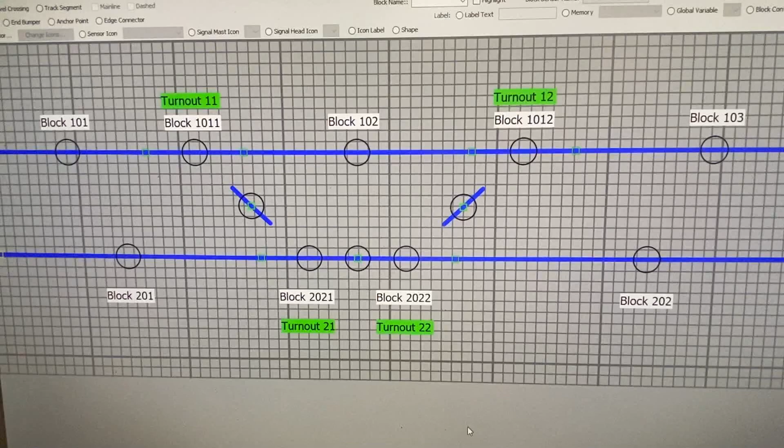Hello everyone. Welcome back to some more discussion of how to set up signaling using JMRI and specifically the SE74 from Digitrax. I was specifically asked to talk a little bit about a more complex situation where we have two crossovers back to back with the points connecting here at the bottom.

Let's talk just a little bit about my nomenclature. I call this mainline 1, mainline 2. And I tend to then use the numbers 101, 102, 103 for the blocks. And each turnout has its own block, which in this case, just so that I understand that it's a turnout, I use four numbers, so I'll use 1011 and 1012 for those.

2's on the bottom, again 201, block 2021 for turnout 21, so forth. And I start my turnout numbering 11, 12, 13, 14, whatever. And on the second main line, turnout 21, 22, etc. It just kind of keeps things a little more simple. So at any rate, the problem is how do we want to set up signaling for these various turnouts?

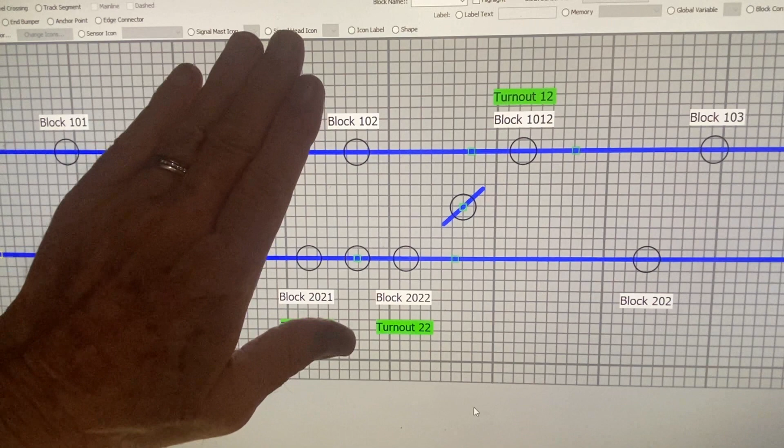If you've watched the other videos, then you know how to set up, for example, the signaling for a single crossover here. And that was explained before. We won't do that again. I will put those signals in here and we'll talk a little bit about them. But the logic behind them, I'm not going to dwell on too much, although we will cover a little bit of the logic because there's certain things that we want to make sure that everybody understands

why we're doing a particular thing. So also the other concept that we would like to do is to use the minimum number of signals that we can do rather than putting a whole bunch of signals along here that clutter up and really start to become difficult to not only set up but also to read if you're the engineer or running your trains on this layout.

Also, I'd like to point out that I consider or assume that the two turnouts making one crossover operate together and not independently, so that if we change this turnout, it also changes turnout 11, so that the crossover is complete. We assume that you don't turn one turnout without the other one. You may find a situation where that's necessary. In most cases, I don't think so.

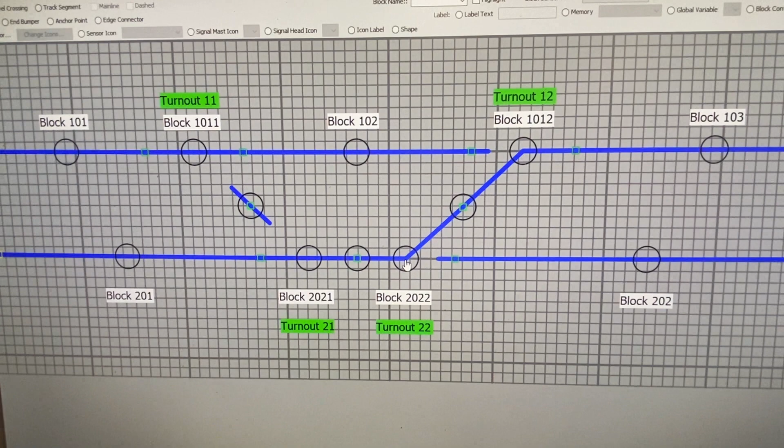So both of these turnouts are set up to operate together and not independently, and that will affect what kind of signals we put in here. For example, if you're familiar with the terminology from before, we would have an A1, A2 signal here. We would not need a C signal coming this way because we assume that if you pass this turnout with an A1, A2 signal, that it was clear all the way through. We will have a B signal here and a B signal over here.

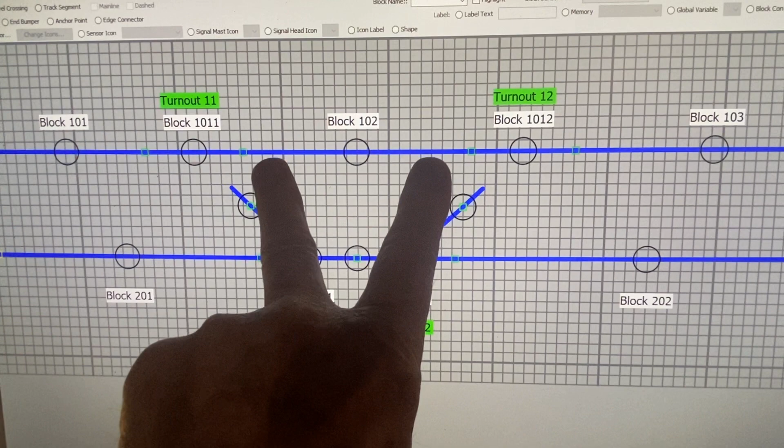The problem that we would like to avoid in this case is to not have a whole bunch of signals in a row up here. Now, some people might say, well, this particular block should be split and part of it go with block 1011 and the other part with block 1012. Okay, I could go along with that. However, the way I set it up, there is a block between these two turnouts. It may or may not become an issue,

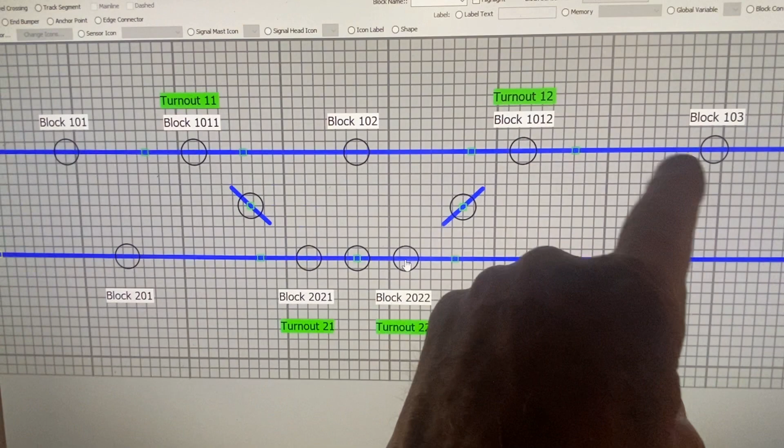but the main concern is how to deal with the signals on this upper turnout, or upper main line, because we would like not to have to put signals here, here, here, and here to accomplish our mission. And we'll talk about that in just a minute as we look at how we place the signals.

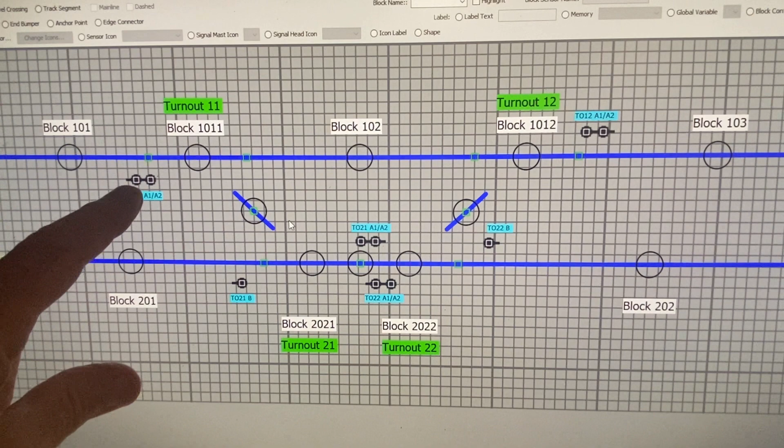Okay, now I have added various signals at the points where I think they should be. I've labeled them appropriately. For example, here, this is turnout number 11, A1 and A2, the top one being A1, the bottom one being A2. If you need to go back and look at some of the previous videos where I explain why this terminology is used, it might help you to understand what we're doing here. If you remember all of that, fine.

I'm going to run through a couple of things with you here about why we're setting this up this way. Again, this would be turnout 21, the B signal, and you notice that nowhere on here do we have a C signal. So we're not using those. We have 2, 4, 6, 8, 10 signal heads that we're going to set up to operate our layout.

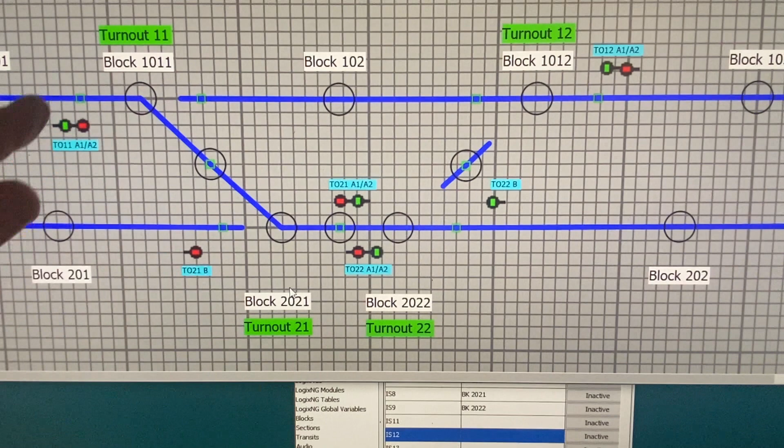Okay, in this situation you can see that I have placed the signals and I've made all of the normal logic that we would encounter with a signal element, except we do not have any C signal heads placed on here, as I explained before, because we'll assume that if we are making the crossover, if this is green for the turnout and this is green for the turnout, we don't need a C to indicate that this turnout is set correctly, because this light will govern passing here all the way down until it gets onto the second main line.

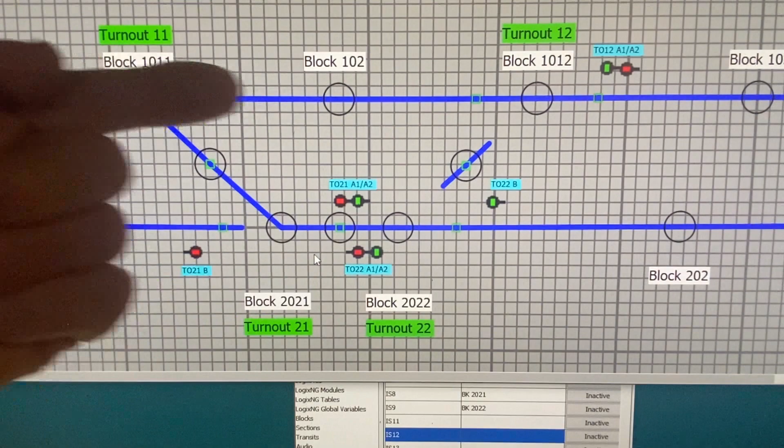So in this case, for this turnout complex right here, signal element, this is A1 and A2 for turnout 21, and this is B for turnout 21. Likewise, we have A1 and A2 for turnout 22 here, and we have 22B up there. We've also placed the A1 and A2 signals for turnout 11 and turnout 12.

Notice that in this case there is no B for the main line against the turnout. And again, we don't have a C because we're assuming that this signal head will control the flow of traffic through the turnout, through the crossover.

All right, so at this point we have all of the normal operational heads set up as they should be, so that as we throw these turnouts, the straight through goes red and the turnout for the crossover is green. Likewise here, this goes green on the bottom for the turnout going through the crossover. Same with the signal heads for turnout 12. So these are all working as we would expect them to, as we have demonstrated in previous videos how to set them up.

We have also connected all of the block detection, so in our sensors table down here, we have all of the blocks listed, and if we make any one of them active, like 101, you see that block 101 over here is now red, and likewise we can make any of the blocks active by just clicking on the sensor and changing it to active, and then it will do the appropriate thing.

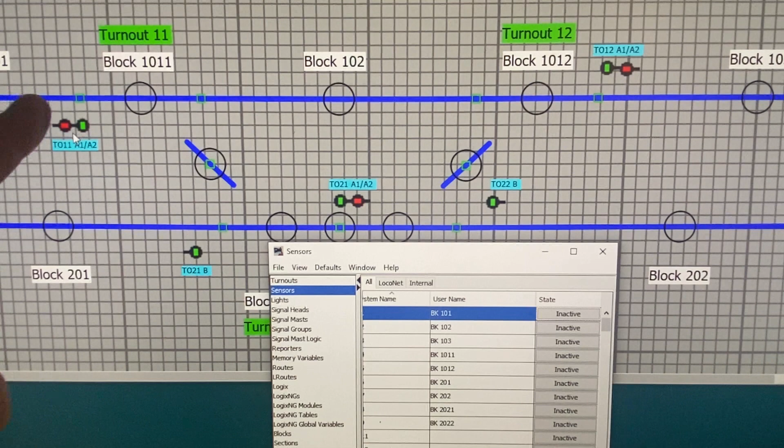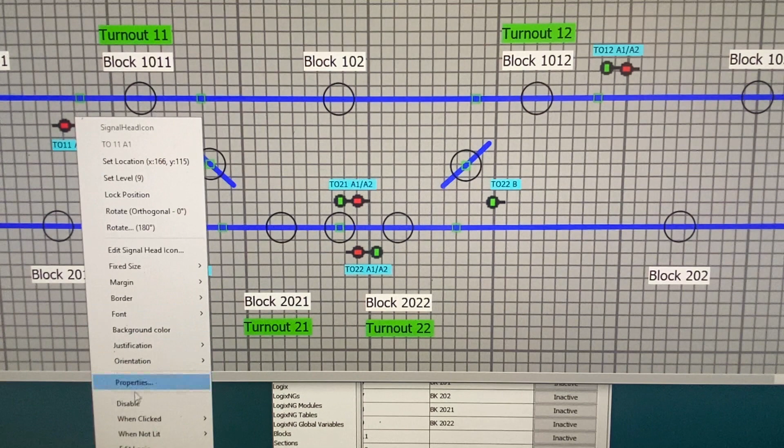So for example, right now the way this signal here is set, we have a green saying that there is no train in either block 1011 or block 102 or block 1012. If there's a train in any of those, we want to hold the next train back here. So if we make any one of those blocks active, that goes to red.

So just to check on that, we can right click on the signal head, go to Edit Logic, and I'll bring it down so that we can see it. You'll see here that we are protecting block 1011, block 102, block 1012, and additionally block 103. So no train can go past this signal if any of these blocks are occupied.

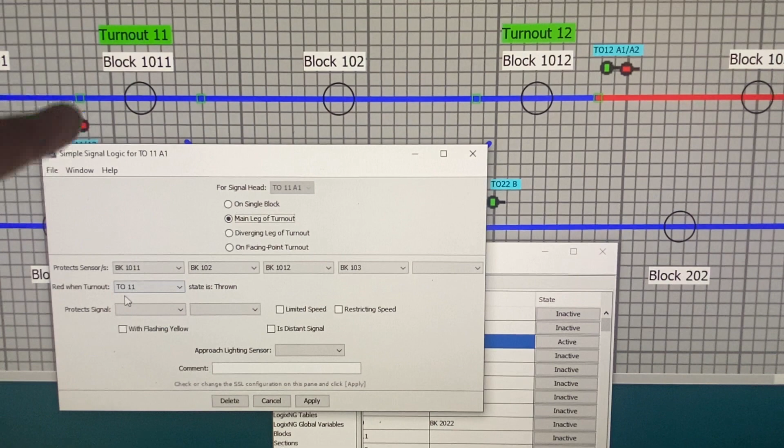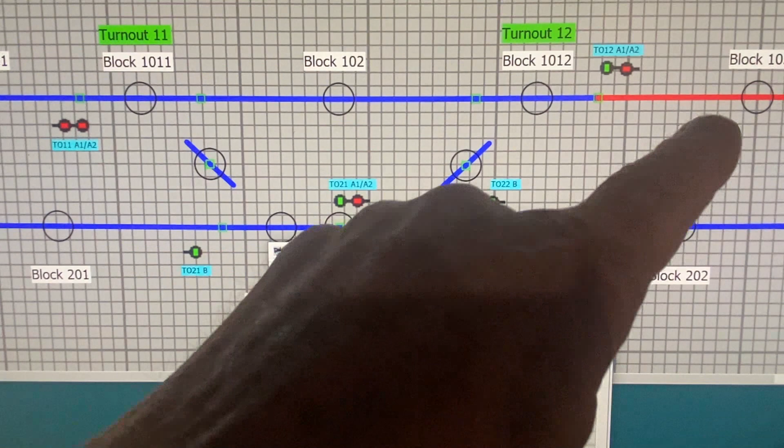For example, if I make block 103 active, you'll see that this light goes to red because it's monitoring. If there's a train clear over there, we want to hold all the trains here. We don't want them to get into the signaling complex at all. That's all that has been done in the setup for the signal logic so far. And if I put block 103 back to inactive, then the green light is showing correctly.

We do have a problem here, and this is the one that one of our viewers asked me to look at for his own particular situation, how to set it up. And it gives us a chance to look at something called Logix. And I'll go through how we're going to do that.

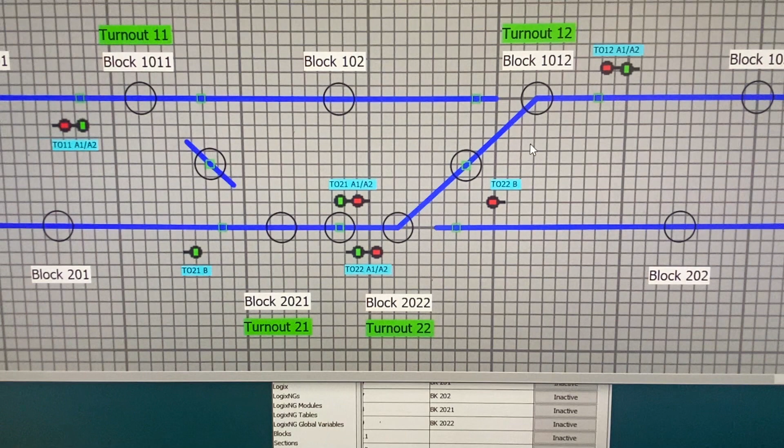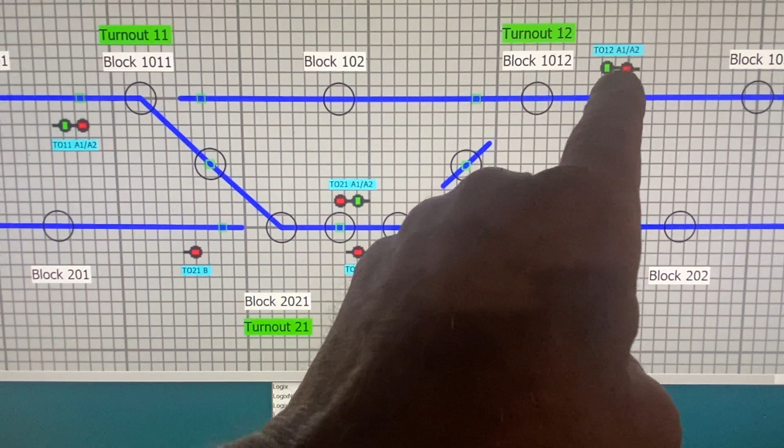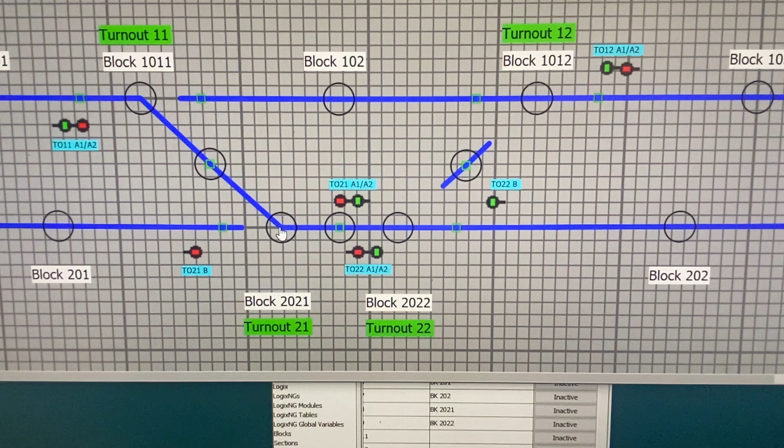Here's the problem. If this turnout is set for the crossover, shouldn't this green light go to red? Because the train cannot go straight through there. We do not have any other signal to stop the train from going through a thrown turnout, and that becomes a real problem because we have to have a way to make that light go red to stop the traffic. Likewise, in the other direction, we need to make this signal go red because you can't allow a train to go past this point going this way.

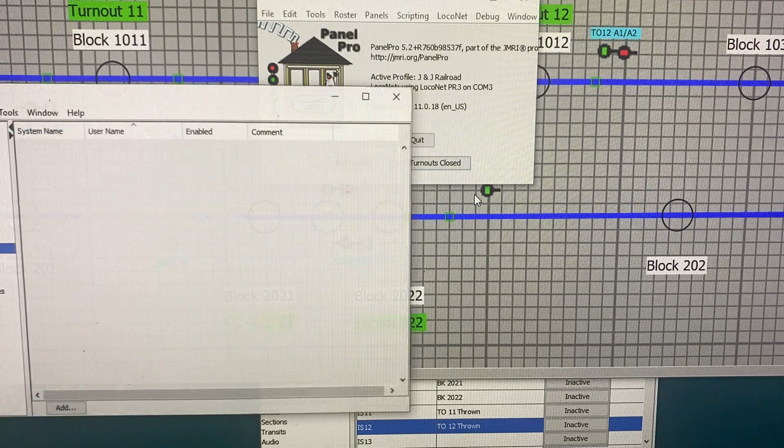And with our normal setup from previous videos, there's nothing that we could do that would make that correct. We need to use something called Logix. And this is a very, very hardy system of questions and answers to set up something on your railroad the way we want it to be.

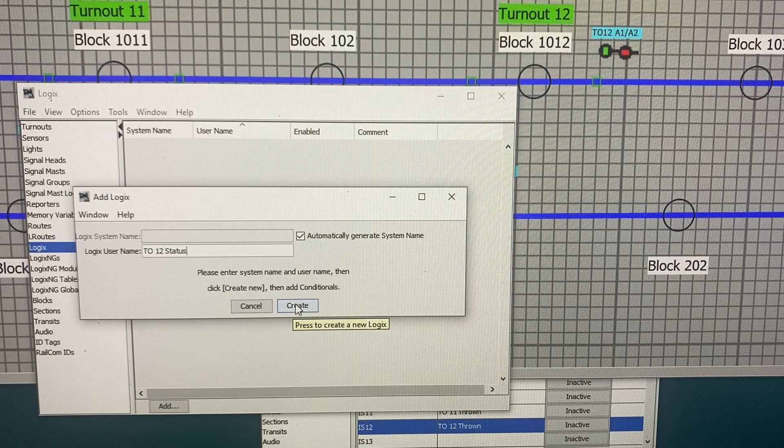So basically what we want to do is to have a method so that if this turnout down here, 1012, or turnout 12, is set for the crossover like this, we want to be able to make that light, that signal, A1 for turnout 11, go red. So that's what we're going to work on right now.

Now, in order to do that, we need some kind of a sensor that when we go into the logic for turnout 11, we need to have one more sensor that would cause it to go red. Right now, if any of these blocks are occupied, this light goes red. If the turnout is thrown, that light goes red, obviously, because you can't go straight through. But what do we do if this one is thrown? We need to make this go red.

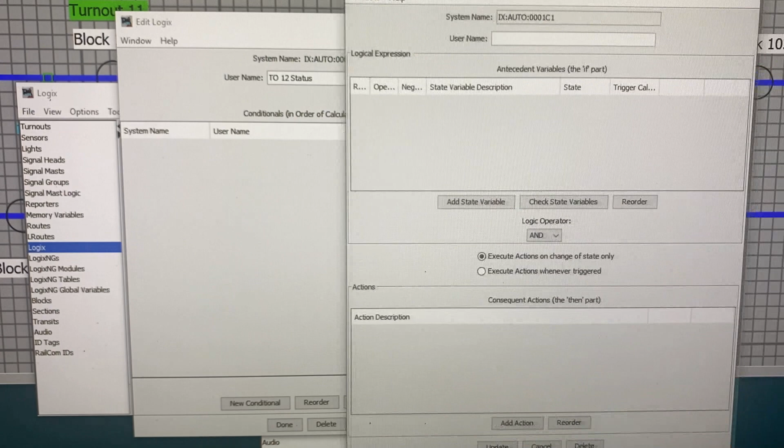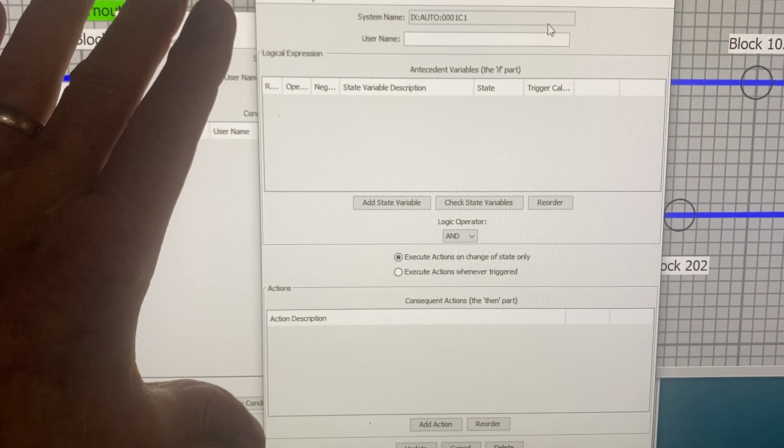So what we need is a sensor that we can add here so that if that sensor is active, then that light would go red. And that's what we're going to work on now. So what we need is a sensor titled Turnout 12 Thrown. All right, so I'm going to come down and I've got a bunch of sensors down here that are already set up, internal sensors. We've already set up all of the sensors for the blocks involved in this.

Now we're going to name a sensor, actually we're going to get two of them. I want a sensor to say if turnout 11 is thrown, it becomes active. And I want one that says if turnout 12 is thrown, it becomes active. So we're going to add two down here. Well, they're already installed, as you can see. I've got several internal sensors already set up there. But what we want to do is specifically name it.

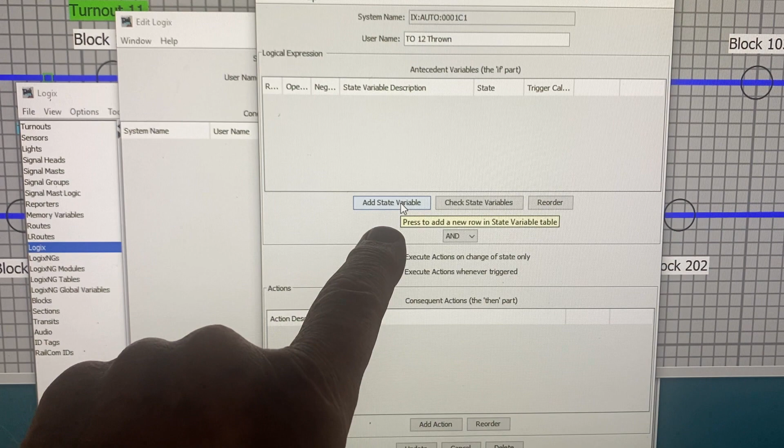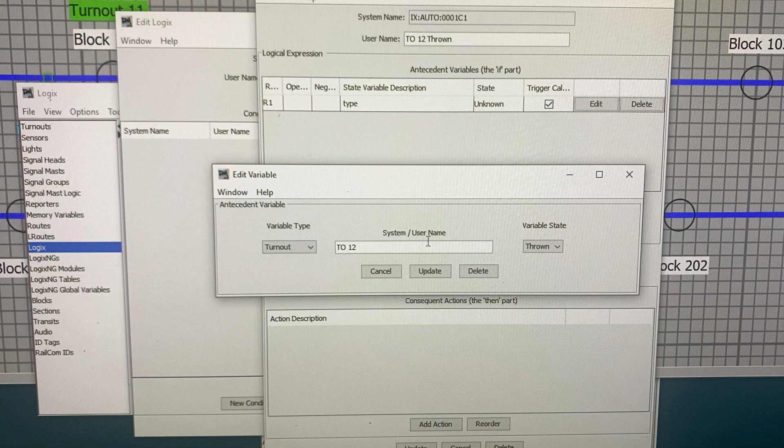So I'm going to put a username in internal sensor 11, and we're going to call that turnout 11 thrown. Now, if I could type, it would help. Okay, so turnout 11 thrown is the name of a sensor. It isn't going to do anything yet because we haven't told it how to work. There's no actual sensor like block detection or anything hooked up to that. So for right now, it's just a named sensor that we can use.

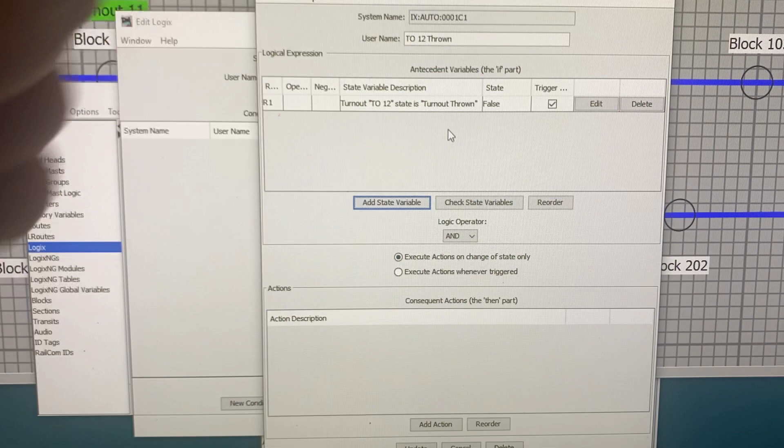And I'm going to also name one turnout 12 thrown. Turnout 12, let's put a space there. Turnout 12 thrown. So we now have two sensors with specific names. You notice that if we make them active, nothing is happening. Now here's how we're going to use them.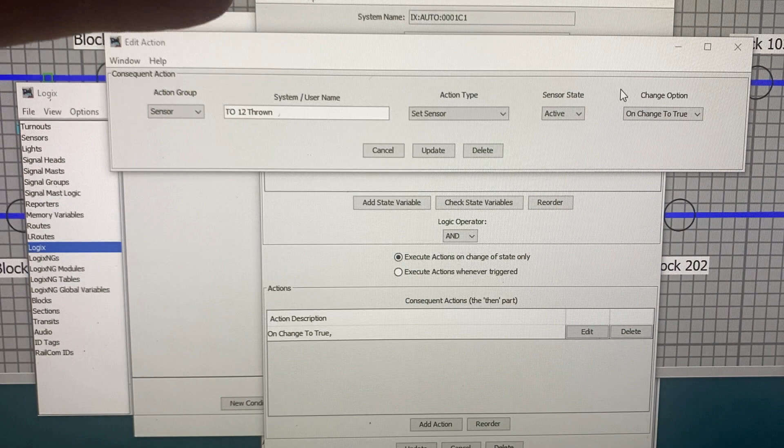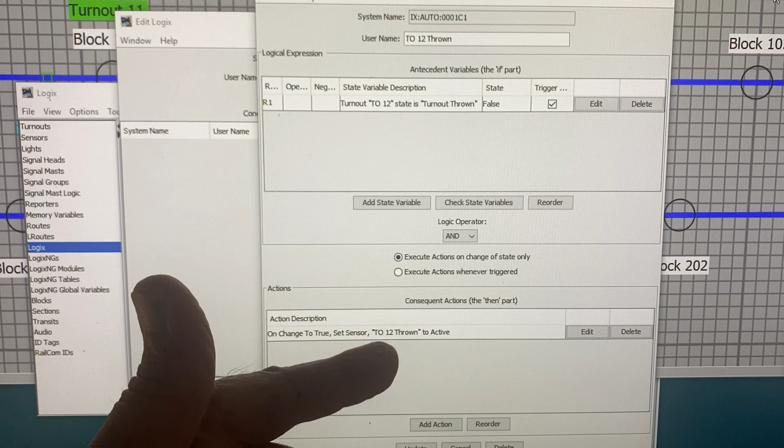We want 12 thrown so that if sensor 12 thrown is active, then it will cause that light to be red. So we'll click apply, we'll click close, and nothing has happened yet. Even though that turnout is thrown, we haven't told sensor 12 any way of knowing that. We have to get to that point. But let me just make it active and see what happens up here. Notice that that A1 light for turnout 11 now goes to red. If I make it inactive again, then it goes back to green.

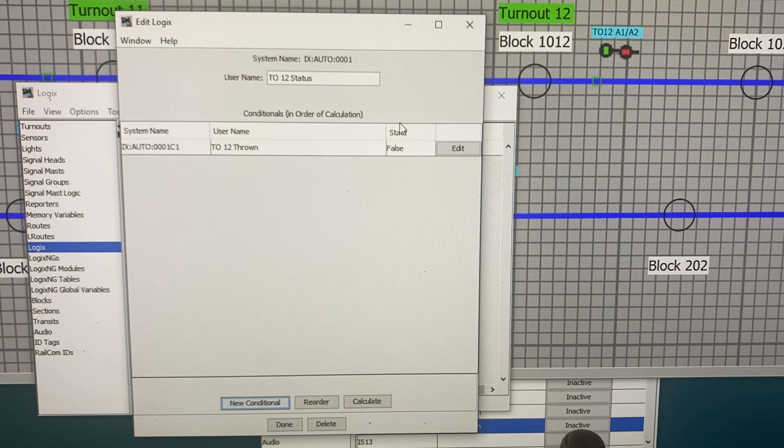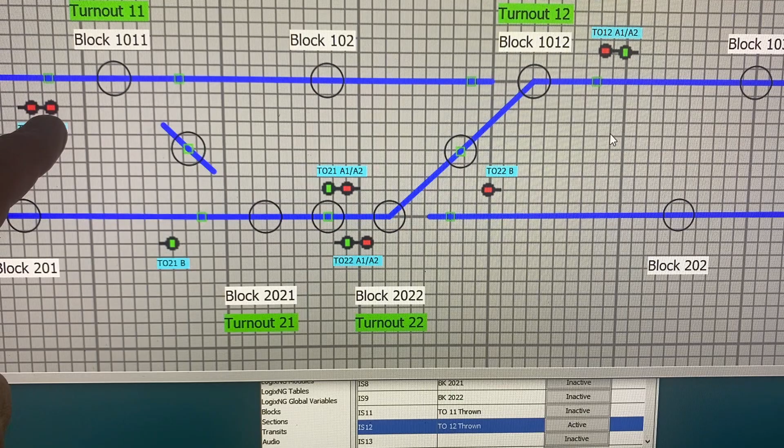So if I click this turnout to go to the crossover position, nothing happens to the A1 light over here because we haven't yet shown the sensor 12 thrown sensor how to interpret that turnout, and we'll do that. But everything is connected. All we have to do is make the sensor respond to the position of the turnout. And that's what we're going to do next. And that's where we get into a whole new area of JMRI, which we previously haven't discussed, but it's very powerful and very useful. And that is in the area of Logix.

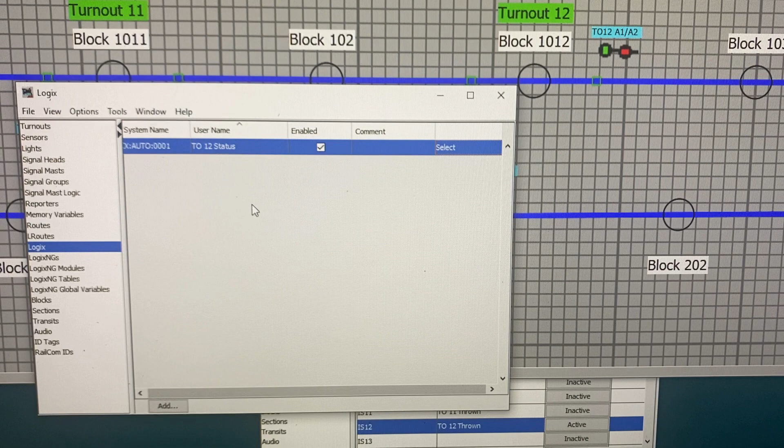Now, what I'm going to do is click Tools, Tables, and we come over here to Logix. Now this is another whole table. When we open that table, we get this display right here. And as you can see, there's nothing in there. We haven't put any Logix in there. But what we're going to do now is tell JMRI how to make this turnout 12 thrown sensor active. And the way we do that is we add Logix.

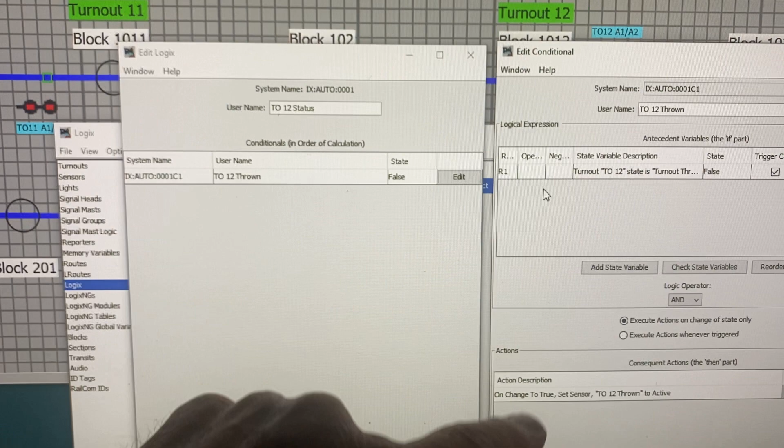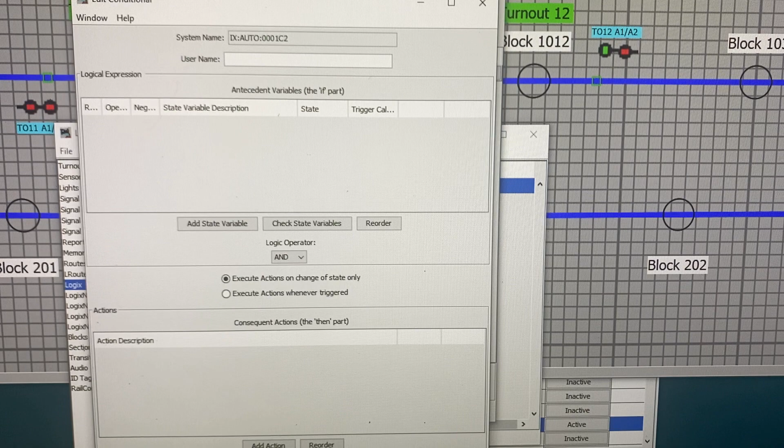And we start by coming down to the bottom and clicking on add, and we get this add a Logix. First of all, we click on automatically generate system name. We don't want to have to keep track of how the system deals with these things. But in order to create it and use it, we ought to give it a name. We're going to call this Logix the turnout 12 status.

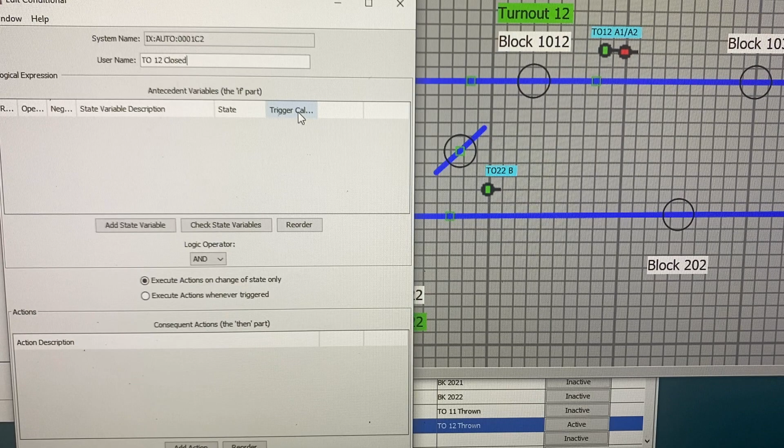And we'll create a Logix system based on that. So once we've typed in the name, it's automatically going to generate a system name. We click on create. We're going to get some new boxes, and this is what we work with to make the Logix do what we want it to do. In this case, bring it down a little bit, size it so you can see it. I try to keep it so we can read all the terminology on here, so sometimes the stuff is a little bit out of the camera view.

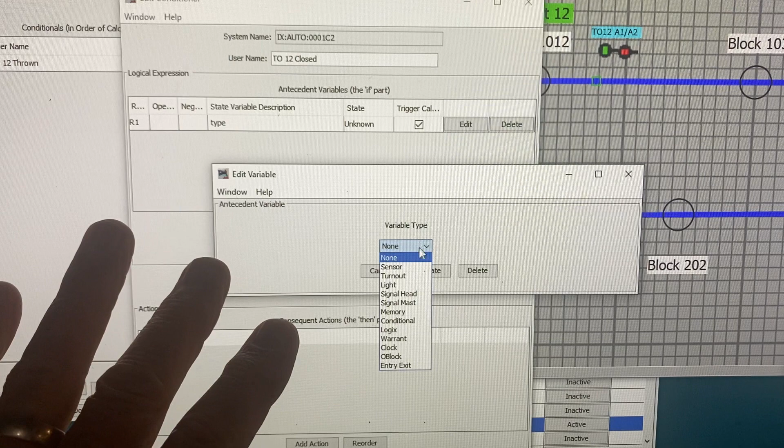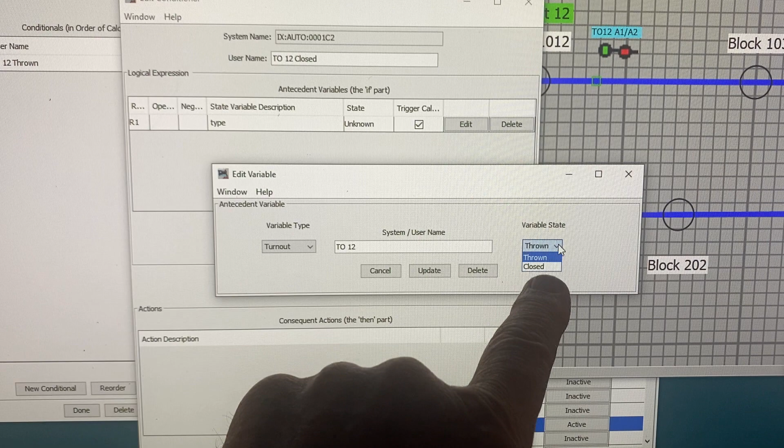But this is how we set up a Logix, and our Logix here is turnout 12 status. In other words, we're going to make that turnout 12 sensor down at the bottom either active or inactive. And we do that by starting off, we have to create a new conditional. Now, some of you may recall from your high school logic class, if you ever got that far in math, what we're creating is an if-then situation. In other words, if this is true, then do this. And that's what all of these are about.

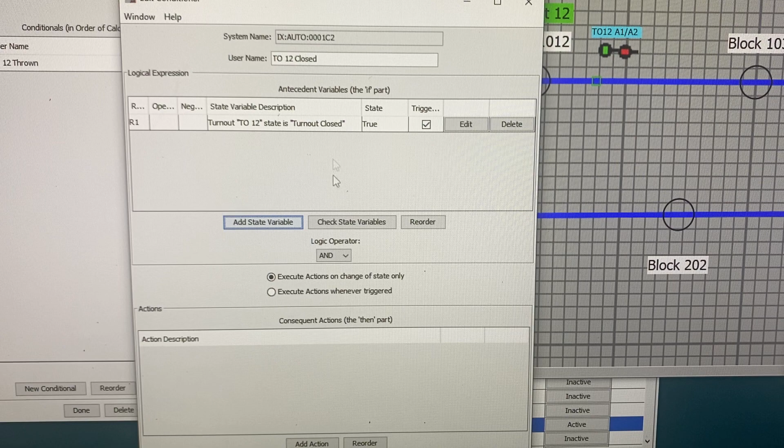There's two parts to this new window that has opened up. One part is at the top, and that's going to be if this variable, and we'll add a state variable. If that variable is true, then do this action down here at the bottom. And that's what we're going to set up. So to start off with, we're going to give this particular action a name, and that is if turnout 12 is thrown.

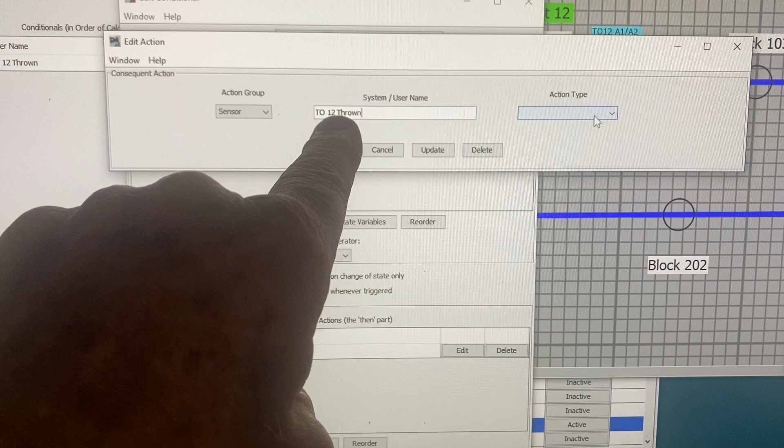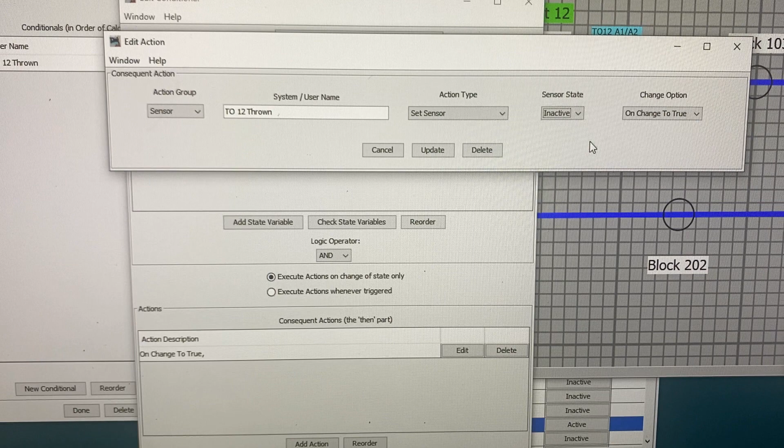And the way that we're going to determine that is, first of all, we'll come in here and we'll add a state variable. All right, well, that's going to give us a new box. Got lots of boxes to fill in. This box is the variable that we want to examine, and the variable we want to examine is the turnout. So we'll click on turnout. That then says we have to come up with a name, which username, which turnout do you want to examine? We want to examine turnout 12. And we will then update that.

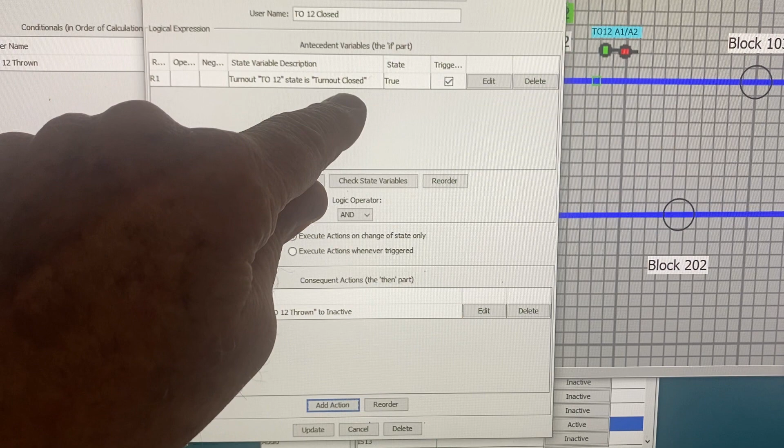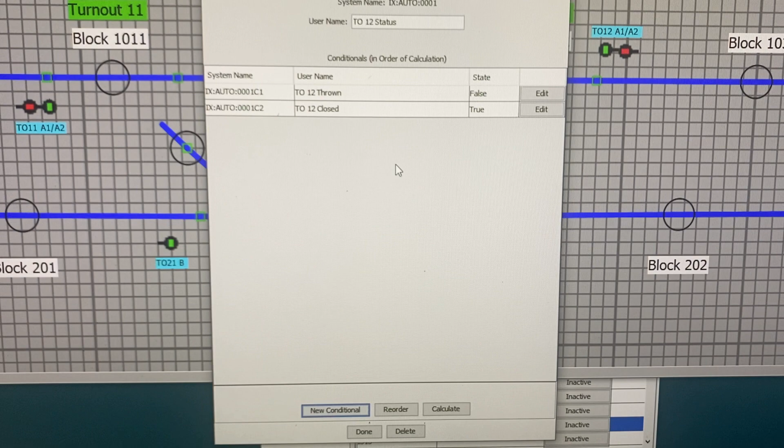And what we get now is a statement up here that says turnout TO12, that's the name that we've given it, state, is turnout thrown. And if that becomes true, if the state of that is true, in other words, if turnout 12 is thrown, then what do we want to have happen? So that's the if statement up there. Now we're going to add an action. So down at the bottom we say add action. Oh, another box we have to fill in.

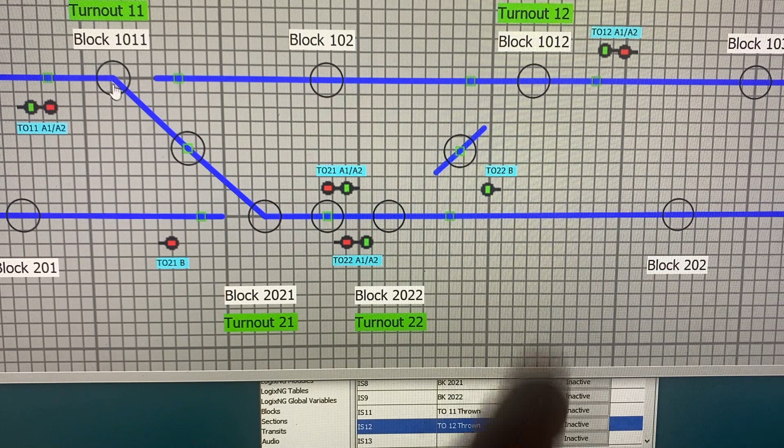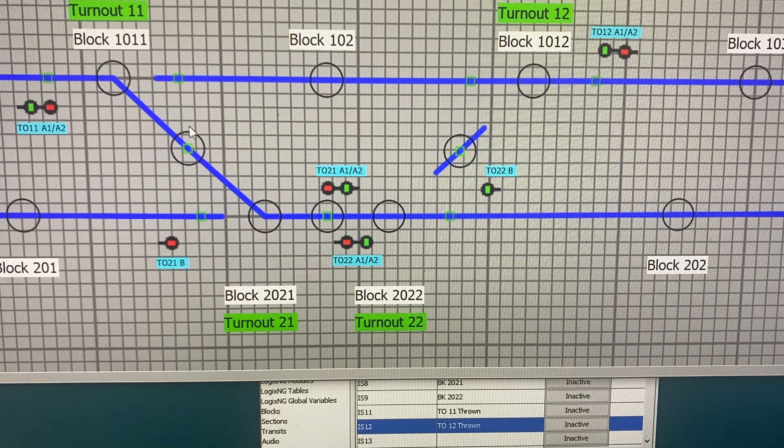In this case, what we want to do is set a sensor. And that sensor that we want to set is turnout 11 thrown. We want to set that to active. So right here we'll put in turnout 11 thrown. That is the sensor. That's the name of the sensor that we have in our list. They give us a box over here. I can't get everything on at the same time, but there's the name of the sensor that we want to set active.

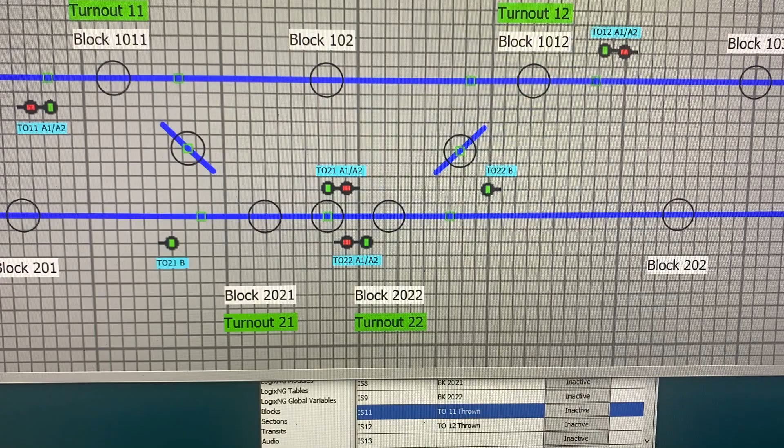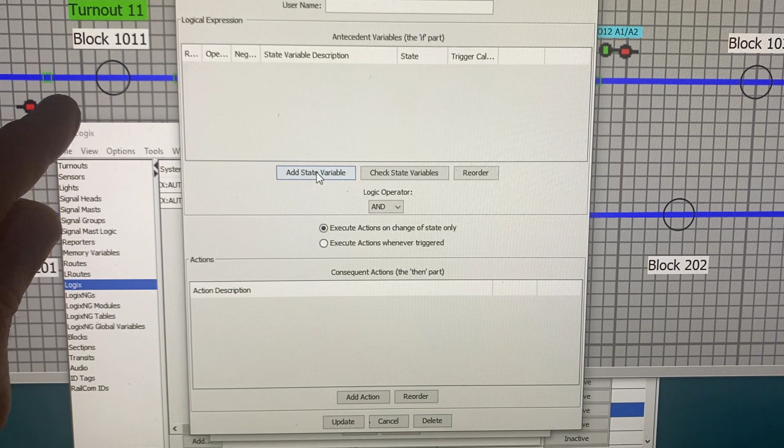Okay, so what do we do? Well, the action that we want to take is right here. We want to set the sensor, set sensor active on change to true. So that whole statement is what's going to take place. If the turnout is thrown, then this is the action that will take place. So we'll click update, and now we see the whole if-then statement. If turnout 11 state is turnout thrown, then when it changes to true, set the sensor turnout 11 thrown to active. And that's how we tell the sensor to go to the active state.

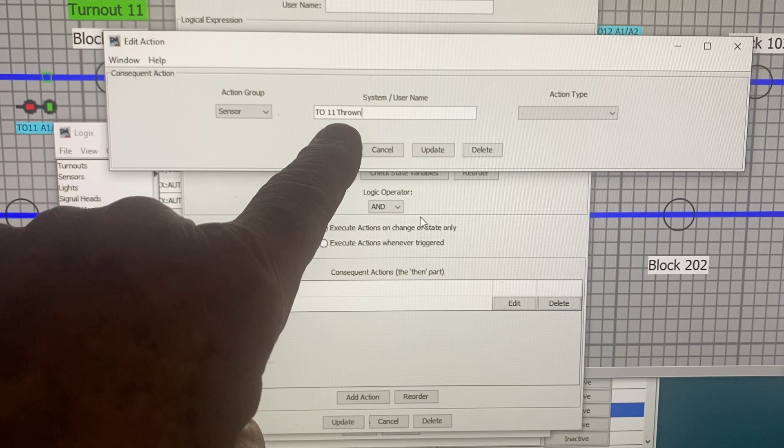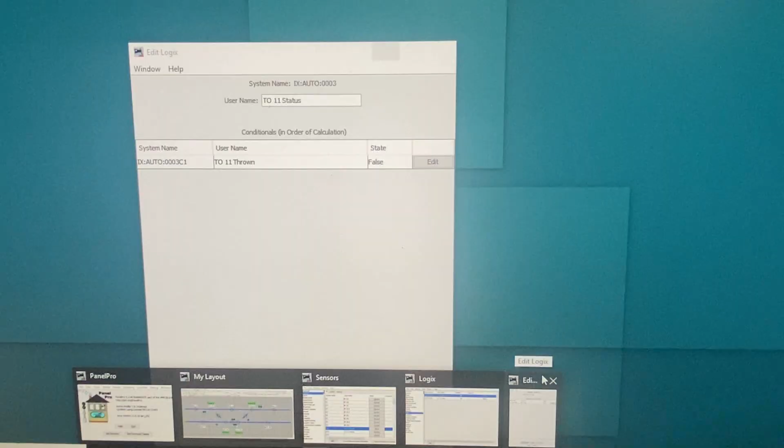So we come down here at the bottom, there's an update button. We click update. And now we have this whole conditional set up to turn that sensor to active. If we throw this turnout, that will go to active. And because it went to active, this A1 light over here for turnout 11 has gone red. And that's what we wanted to have accomplished.

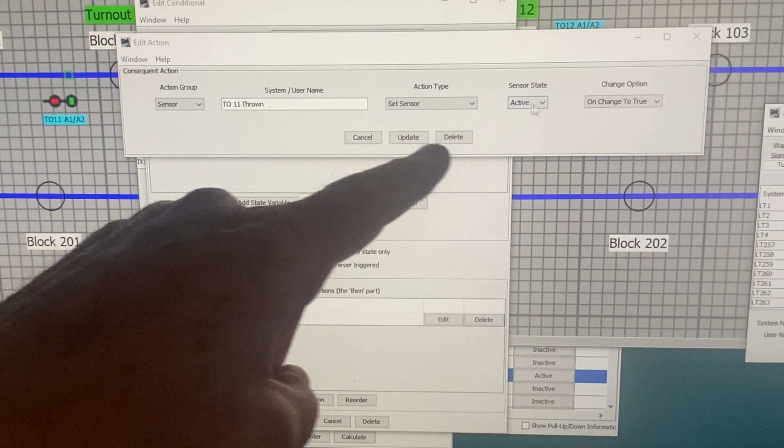That's how we get that turnout, or that sensor, to the active state. So by turning this turnout to thrown, we have accomplished setting the sensor to active. By setting that to active, we have made this light go red because in our list of things to monitor, turnout 11 thrown sensor is one of the sensors that we are protecting.

Now the problem comes that we set that active, okay, but we didn't tell it when to go inactive. So if I turn this turnout back to the straight position, notice this light is still red. Why? Because that sensor is still active. You have to tell it to do everything.

It is not automatic. So we have to go back to that conditional, or to that Logix system that we set up, and we have to add a statement telling it when to go back to the inactive state. Otherwise, you're never going to allow a train to go past this signal down here. You're never going to get it to go back to inactive. And we want turning this back to the closed or straight through position to make the sensor go inactive again, which would then allow this A1 light to go back to green. So in order to add that instruction, we have to come down and open up our Logix again.

And here is the Logix system that we were working with that caused the signal to go red in the first place. We're going to select that turnout 11 status, and we're going to edit it because we have to add another conditional. We've got this conditional. We already know what that is. We could go in and look at it by clicking edit, and you'll see all of the stuff we put in there before. Well, we don't want to mess with that. We've got that set. So now we're going to add a new conditional. So we come down and we say new conditional, and we get this box just like we had it before.

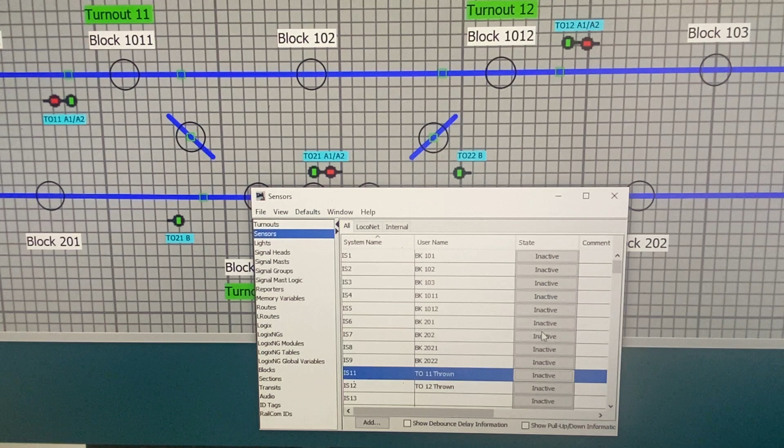Well, what conditional is this? What are we actually working on? And I'll just move these boxes around a little bit so we can go back. What we're working on now is if this turnout is then set to straight. So what I'm going to call this one is turnout 12 closed. So that will be the name of this conditional that we're going to now give instructions so that if the turnout goes to closed, we can set that sensor back to inactive so that it will control our A1 signal the way we want it to.

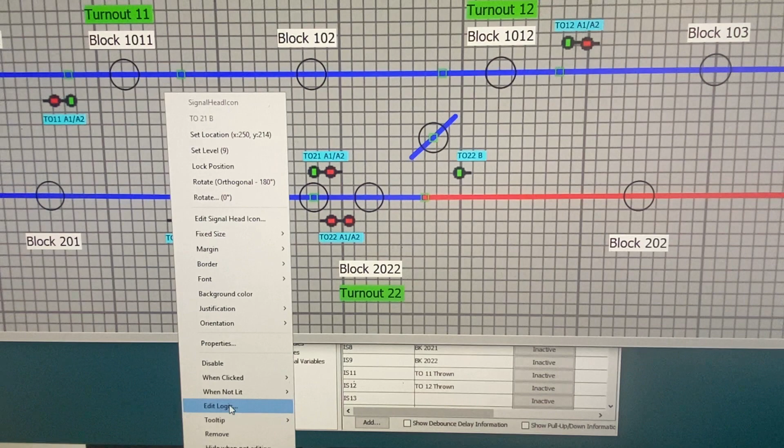So what are the conditions? Again, add a state variable, and that variable is turnout number 12. So we put in turnout 12, spelling counts, capitalization counts, and spaces count. So when I named that turnout, I called it turnout capital T, capital O, space 1, 2. If you don't put that in there, it won't work right. So you have to be very careful about using the proper names that you have set up.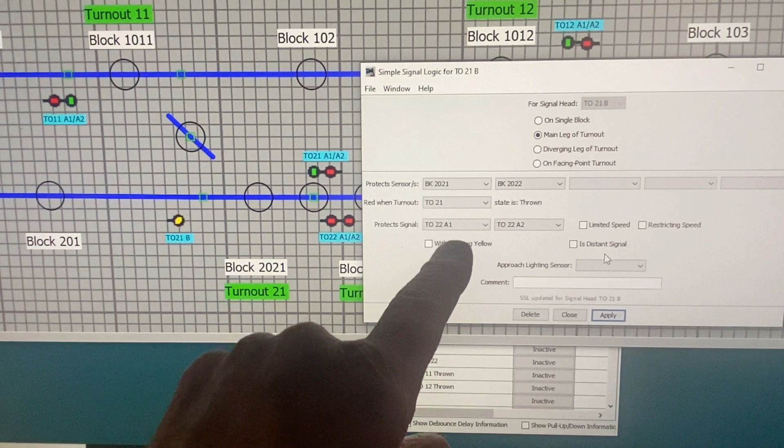In this case, what we want to do is if the turnout 12 goes to state closed, okay, that's our if statement. If turnout 12 goes to closed, we'll update it. That's the if part. So now we've got turnout 12 state is turnout closed. So if turnout 12 goes to turnout closed, what action do we want to take? Well, the action we want is to set that sensor, which is turnout 12 thrown sensor, back to inactive, saying no, it's not thrown. So here's the sensor. We have to spell it again correctly. So it's turnout space 12 thrown with a capital T.

So turnout 12 sensor, that's the one we want to set. And what action do we want to take? Well, set sensor. And what do we want to set it to? Okay, if the if statement is true, in other words, if turnout 12 goes to closed, we want to set this sensor to inactive so that it will allow that signal head light to be back to green. So now we have set that up. Sensor turnout 12 thrown, set it to inactive.

Okay, we click update. And now we have another whole set of instructions here. If turnout 12 state is turnout closed, then set this sensor to inactive. That's what we have set up. So down at the bottom, we'll update it. And now in this whole logic system, we've got two conditionals. One, if that turnout goes to thrown, one, if it goes to closed. And we've dealt with both of those situations. So we've told this sensor down here, the turnout 12 thrown sensor, when to go active and when to go inactive. So we're all done with this.

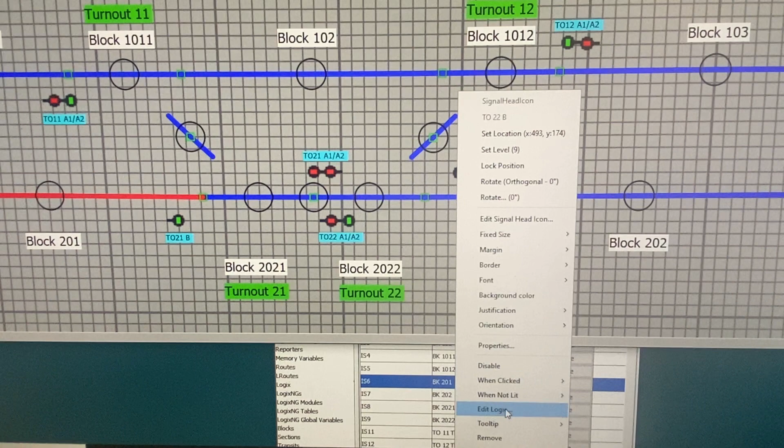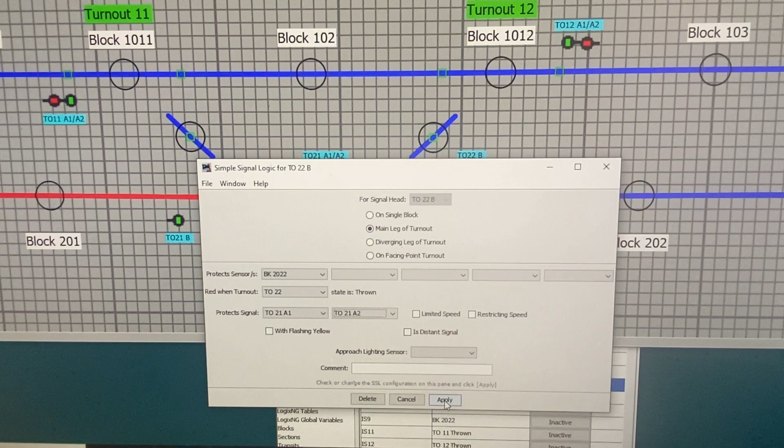We can go done. And now, as we operate this turnout, it goes to red over here to A1 because that turnout is thrown. That sensor is active. When we go back to the closed position, that sensor is now told to go inactive, and that allows the green light on A1 to allow the trains to go through. So we have now set that up so that the A1 light will hold all traffic at this point until everything is clear. Not only the blocks vacant, but also that turnout 12 is set for straight through.

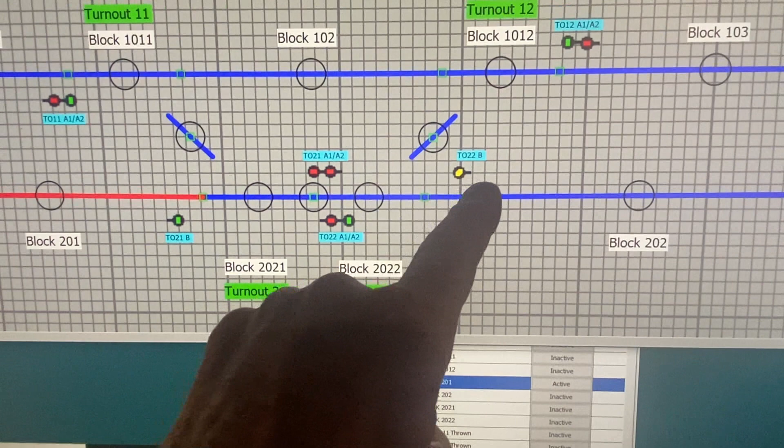As it is now, we get a green light in both directions. This light is monitoring the position of the turnout directly, just like we've always done. But this one had to have some extra work because you can't monitor two turnouts with one light.

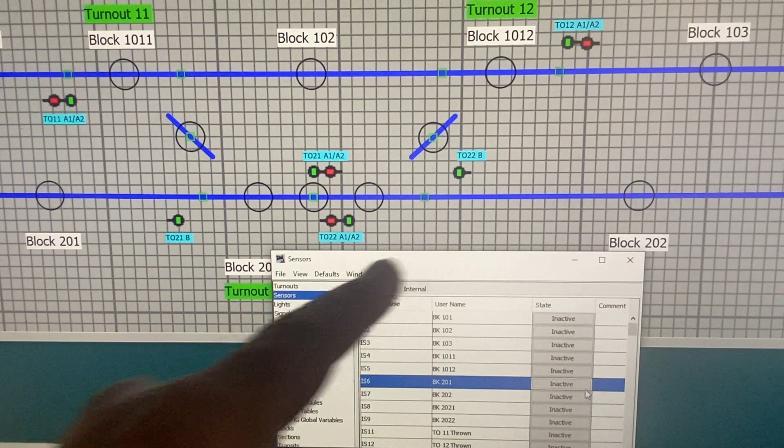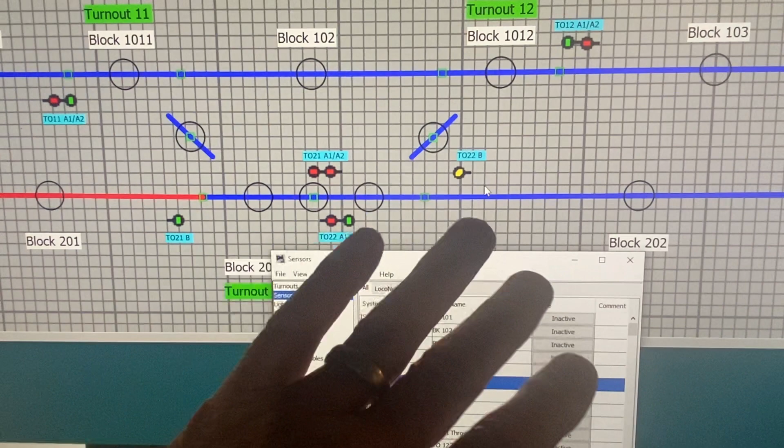So that completes our setup for this direction. But now, what happens if this turnout is set for the crossover? Notice that the green light at A1 is not stopping the traffic, and you've got traffic approaching a thrown turnout. So we want to do exactly the same thing that we did before to set this one up so that if this turnout 11 is set for the crossover, no traffic will go past this point.

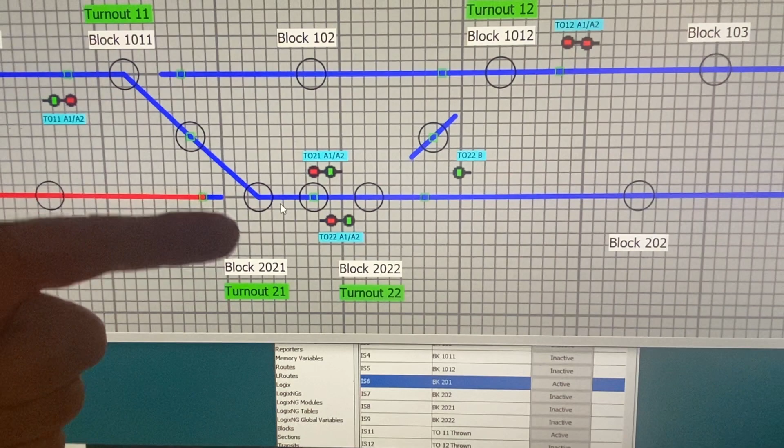Well, we've already set up the sensor down here, but we haven't done anything to tell it when to go active or inactive. So the first thing we're going to do is put that sensor into the logic in the setup for the turnout 12 A1. And notice that we've got down here space for that turnout number 11 thrown sensor. And we'll just go up here and pick that up. I don't know if you can see it, but it's up there. Turnout 11 thrown goes in here.

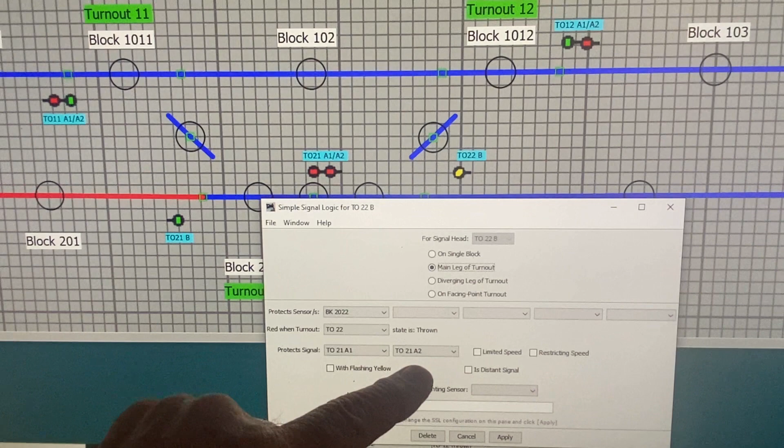And now, if we apply and close, then if we make sensor 11 thrown active, this light down here goes red. A1 light is red as we go active or inactive. But we haven't done anything to tell that sensor when to go. So even though we're changing the turnout down here, the light remains green because nothing is telling the sensor to go active. So now we have to build that Logix as well, just like we did when we were talking about this turnout being turned to the crossover.

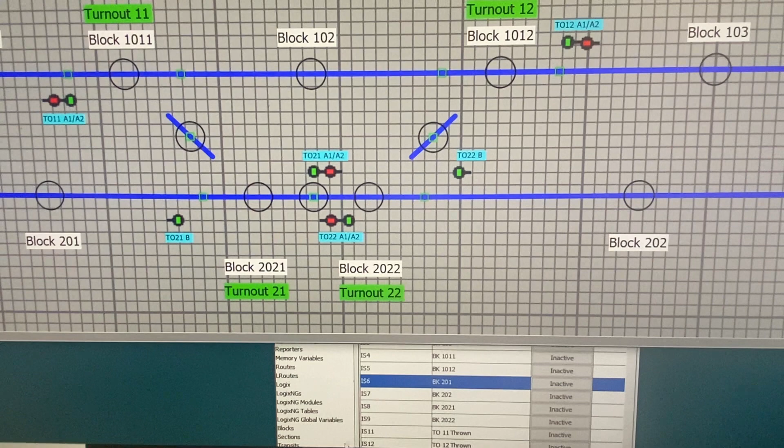So we'll come down and we have to open up our Logix table again. And now we're going to add a whole new set of Logix. So we're going to add a Logix statement. And this one is going to be not turnout 12 status, but turnout 11 status. So I'll make that turnout 11 status and I'll create the Logix. So far there's nothing in there. This is where we add our various conditions, the if-then statements. So we're going to add a new conditional. That brings up a new window.

I have to keep moving these around to try to get them where we can see them. They come up all over the screen, and if I get the camera any further away, you can't see them.

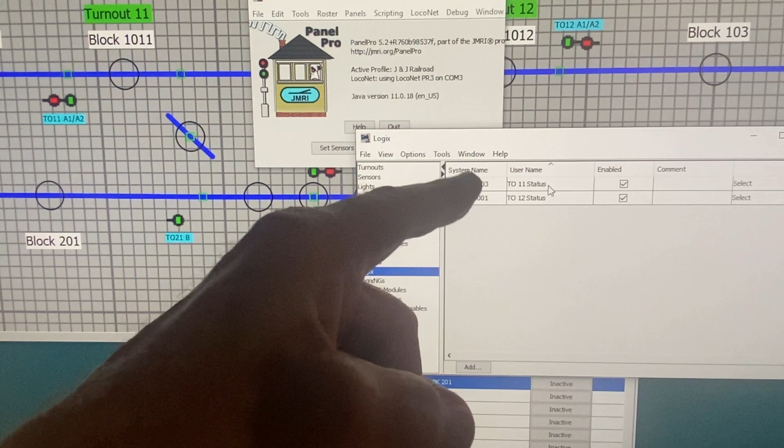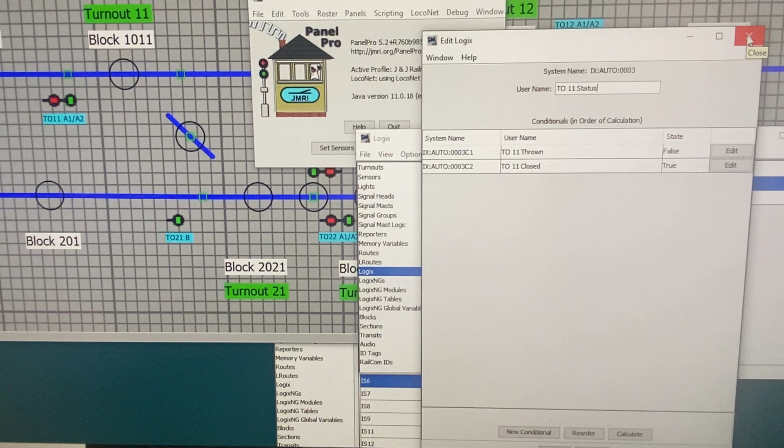Okay, so now we're going to add a new conditional. So the first thing we have to do is say, what's the if statement? Well, the if is, if turnout 11 is thrown. So here we go. What variable type? We drop the box down and we get turnouts right away. So if turnout, and this is where we have to type correctly again, turnout space 11, otherwise it won't work and you'll have to go back and figure out why. If turnout 11 is thrown, well, that's what we want. So that's the if statement, and we'll update it, and it goes up here.

It says, if turnout 11 is state thrown, then what do we want to have happen? Well, in this case, we want to set sensor turnout 11 thrown. And remember, spelling counts, so you have to get it correct with all the spaces in it. Turnout 11 thrown, and what do we want to have happen? We want to set the sensor to active. Okay, we update. Now we have our if-then. If the turnout is state thrown, then set the sensor turnout 11 thrown to active.

Okay. So now we can come down to the bottom and update that Logix. And again, we've got that part of it all set up. But if we go back up here and we throw turnout 11, it correctly sets the A1 signal at turnout 12 to red. But because we didn't tell how to turn off that sensor, didn't make it inactive, if we set that back to straight, we don't get a change because the sensor is still active down here. So it works this way. It'll make it go active, but it doesn't make it go inactive.